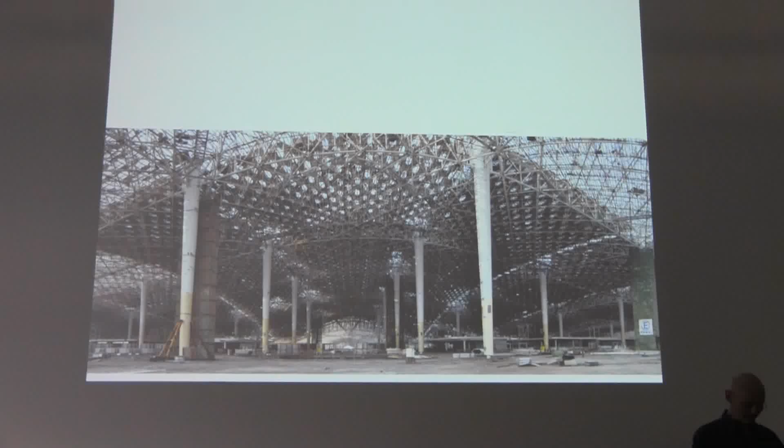Another lecture in our series. And tonight I'm very happy to welcome Jan Knippers. Jan, well, he has this funny combination. He studied all the way in the north in Berlin, where he also did his PhD in 1992. And then he ended up in what is by and by, I suppose, sort of a technical, engineering-wise haven or hotspot in Germany, namely the whole area around Stuttgart.

He went to work for Schlaich Bergermann, a very prominent German engineering firm, after he finished his PhD. And then in 2000 he was called to be a professor in Stuttgart and took over the institute that he's now leading, the Institute for Structural Design.

And then also an important milestone was, of course, a year later in 2001, forming Knippers Helbig Advanced Engineering. It's a firm that has grown over the years, and today it has offices both in Stuttgart as well as New York. And this sort of spread also, I think, is telling of Jan's own development. To look at the list of research projects that they do in Stuttgart is extremely impressive.

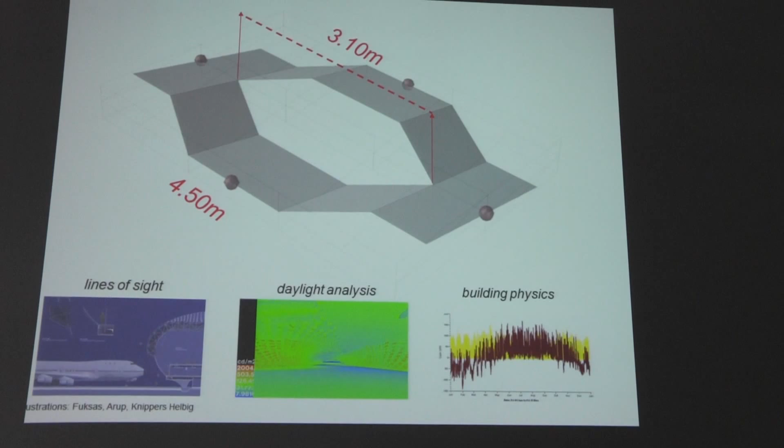These were the 2 design parameters, and we adjusted them to the various conditions of building physics, daylight, and the visual connections that you wanted to have from the inside to the outside.

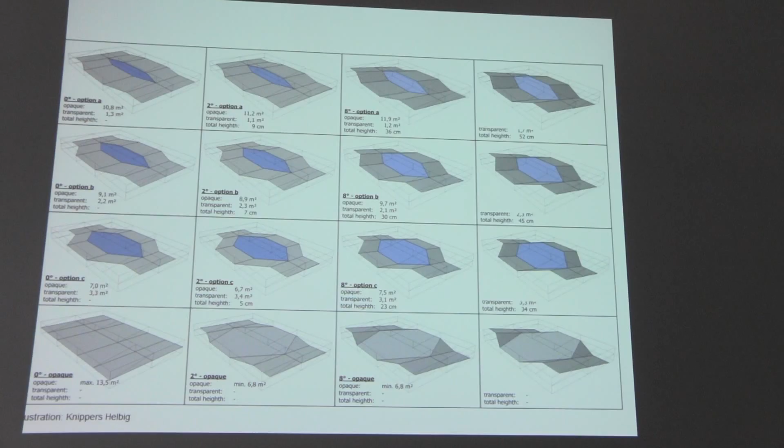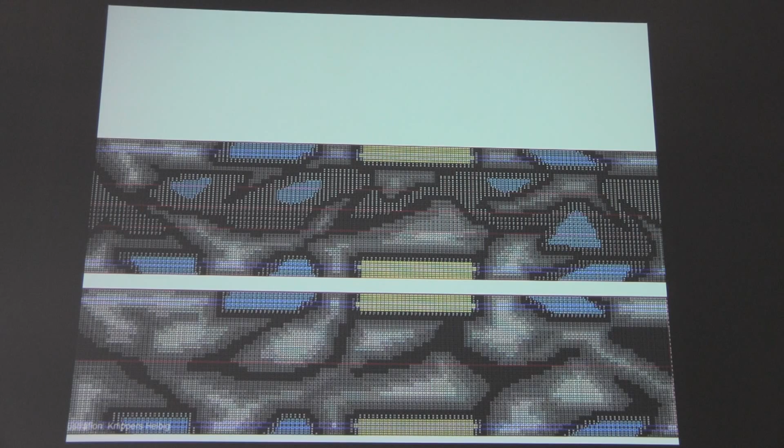So what we basically did is we set up a range of modules, and we allocated them to the terminal building. This is an Excel sheet representing the concourse of the building, and each color stands for one module type. And we printed these Excel sheets and sent them as a printout to the Fuksas office, and he took his pencil and marked how he wanted to have the components of the facade on the concourse building.

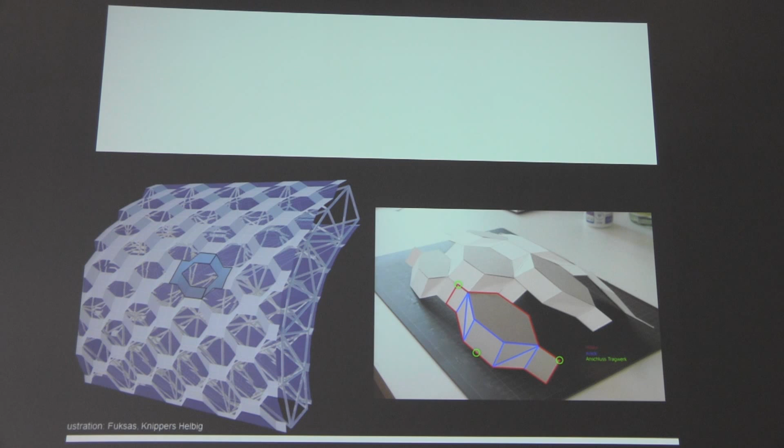It's also very interesting that even though we are quite trained in using all these computational tools, it was absolutely crucial to have these kinds of small physical models, because otherwise the whole geometry is too complex to understand. So from the very beginning, we were working with these physical models. And this was a process of stepwise refinement and modification, adjustment of this 3D model to fulfill all the requirements, to avoid any discontinuities or to achieve planar glass panes.

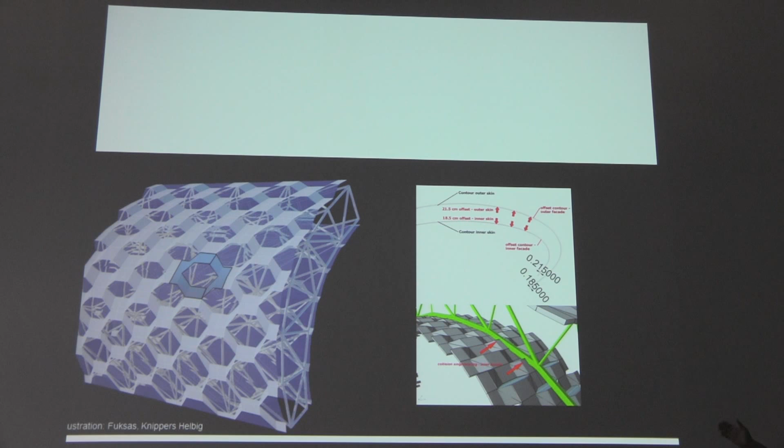That was very interesting because it took us 12 to 18 months to develop this parametric model, including all the structural members as well. But during that time, you don't have anything to show or to hand over to the client. So you always go there, you say you work on the model, but you have nothing to hand over. And that is a quite difficult situation, to keep the client calm and to avoid any nervousness on his part.

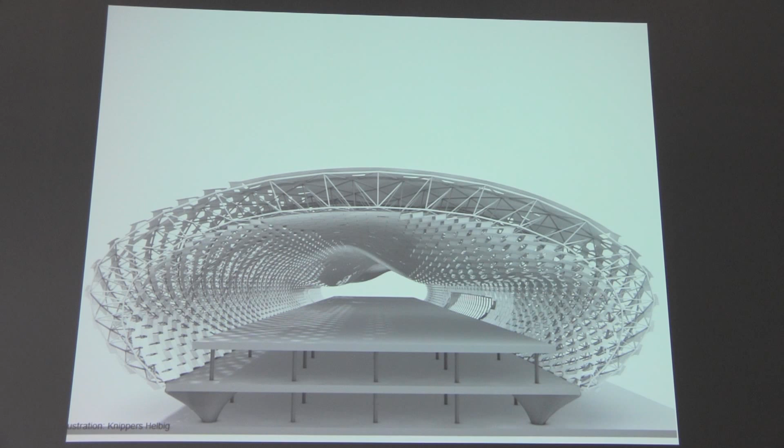So this is just based on Excel and Rhino, so it's not any kind of rocket science computer program or $1,000 million software. It's very simple, basic computational tools that are used here to define this geometric model of the terminal building.

What I think is very interesting and, as far as I know, not really recognized so far, is that this kind of working on a 3D digital model is really a different design process from what we usually have in building construction or in architecture. So usually when we design a building, first there's an architectural concept, geometry from the architect. Then the data is handed over to the engineers. They work on all the technical functionalities. And finally, we hand over our construction drawings to the constructor, and he fabricates all the elements and puts them together on site.

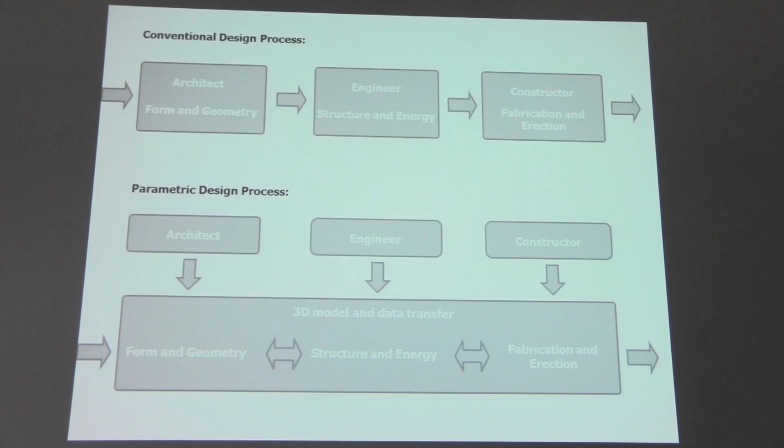But this process, as we had it in Shenzhen and also for other projects, is very different because there's one data model and everyone is contributing to it in some way. But who is doing what and who is responsible for what is not defined by any regulations and has to be discussed and agreed each time again. So in this case, we as engineers were responsible for the basic 3D model. In other cases, special geometry experts are involved, but I think it's a very important factor that you, as part of the design team, define and discuss your own role and your own contribution to the project. This breaking up of role models is, I think, also a very important aspect for innovation in this kind of process.

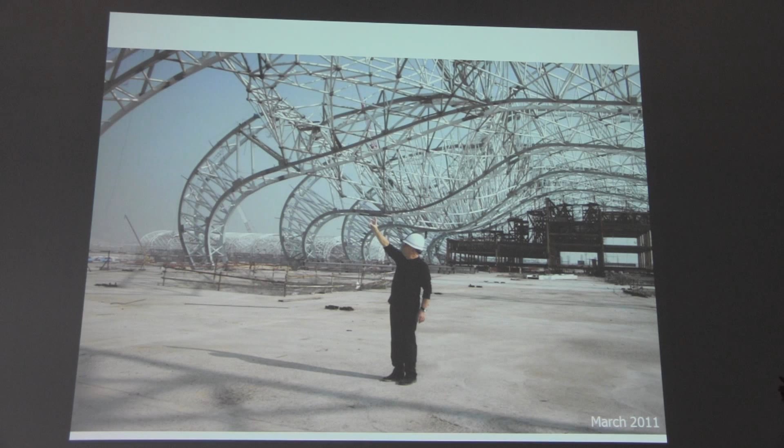So here, Massimiliano on the side, a few words about the construction sequence. You can see in the back this movable scaffolding supporting these spheres, and then the members are welded to the spheres. So while steel construction, here my partner Torsten with Massimiliano on the side. The construction before the internal cladding was installed, during installation.

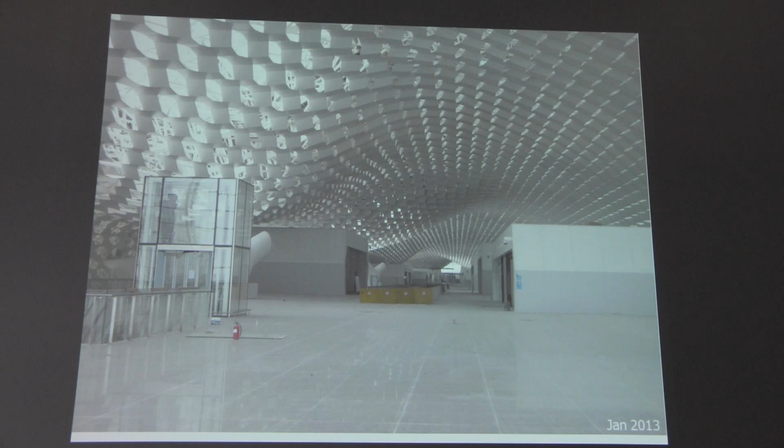And this is a photograph taken 2 or 3 months ago. The terminal building will be open to the public in summer this year. And you can see how the light situation is varying. You can see that in some areas it's a closed surface. In other areas, a lot of daylight comes in, and you can see the structural system behind the internal cladding. This is the entrance hall to the concourse building.

So you cannot talk about construction in China without talking about construction speed. It's a story that has been told many times, but it's still very fascinating, especially when you have this background that you're in Stuttgart or Berlin airport.

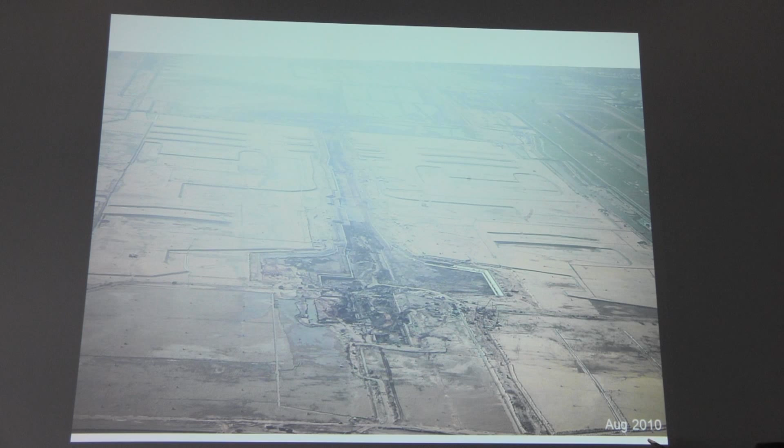I think that this project reflects quite well how computational tools are used today in architecture. They're used to design complex geometries, complex facades, but I have to say, as a structural engineer, the underlying structural system is quite conventional. It's a two-hinged truss arch system; the geometry is a little bit fancy, but the basic structural principle is very well known and very traditional.

And I think that is very typical for the application of digital design. We're always talking about complex geometries, but we very rarely talk about how to use computational tools to improve the performance of the structures. And that is a point where I want to work on in Stuttgart at the university.

And I think that has its origin in the fact that architects and engineers think very differently. Architecture basically always seeks a very individual, unique solution representing the specific conditions of site and function. And Massimiliano is, I think, a particularly good example of that. He's always looking for a very special appearance of his buildings.

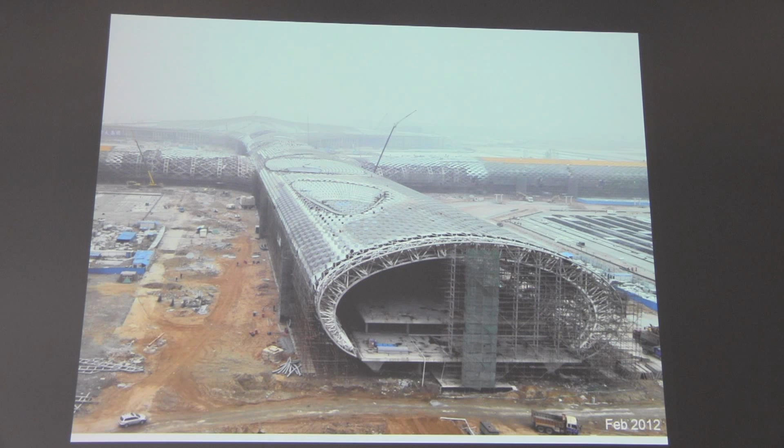Engineers think exactly the other way around. To achieve integrity and functionality of the technical system, engineers always tend to use the same typologies that are approved and evaluated again and again. And that is why we have so many problems, I think, in communication between engineers and architects. It is a completely different way of approaching the design task. Engineers look for the typology that fits the project, while architects look for the unique expression.

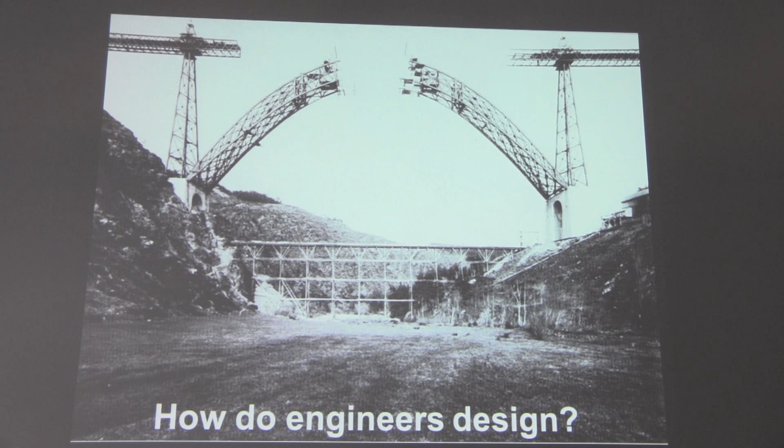And you can see that everywhere, also for these large halls. Suddenly enormous spans, but the same typologies are used again and again. I found this book showing all the railway stations built around the turn from the 19th to the 20th century, and they all use the identical structural system: 2-hinge arch, 3-hinge arch. And this thinking in models and typologies governs engineering till today.

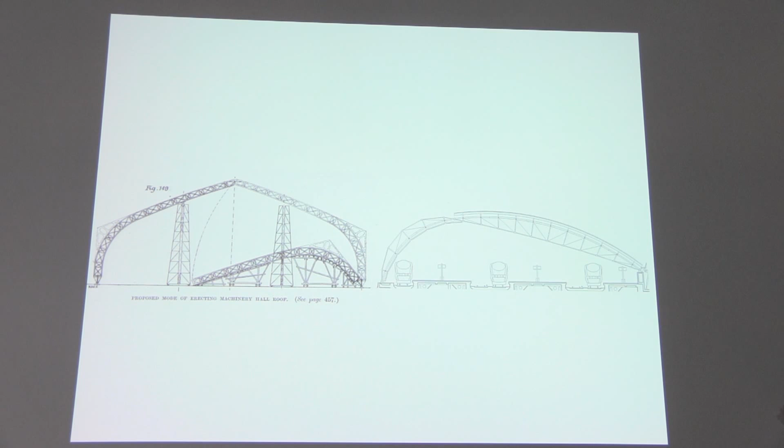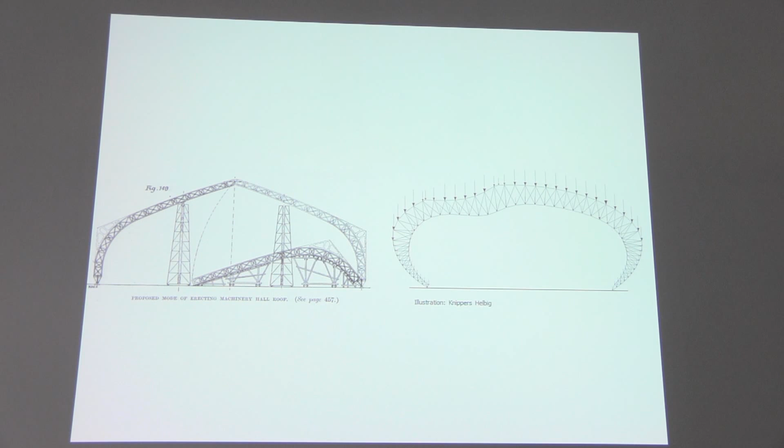Even in times when we have computer programs and can calculate everything, we still use the same typologies. This is a cross-section of the Shenzhen airport. I'm not better than my colleagues. We also use maybe crazy geometries, but the structural system is basically the same that was invented in the 19th century. And the question now is, how can we invent, find new structural systems beyond these typologies?

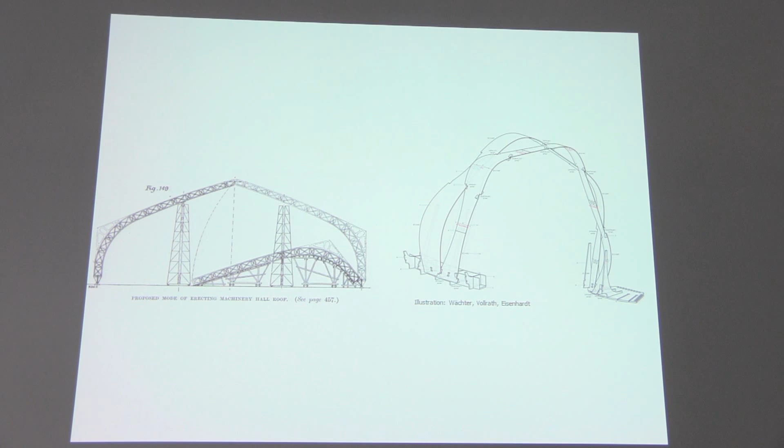And this system here is, in terms of 19th century theory, impossible, because it does not have 2 hinges or 3 hinges. It has 1, 2, 3, 4, 5, 6, 7 hinges. So it's an unstable system in the classic theory of structural mechanics. And this is only possible by geometric variation. So it's no longer a linear arrangement of identical arches.

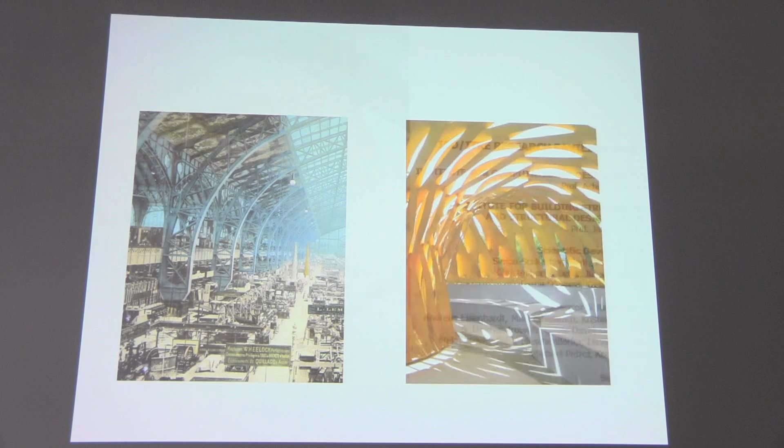It's a complex arrangement of geometrically differentiated forms. The hinges are the weak points of the arch, and to achieve integrity, you have to vary the position of the hinges in the arches. So this up and down of the waves comes from a structural need and is not based on an artistic, aesthetic intention.

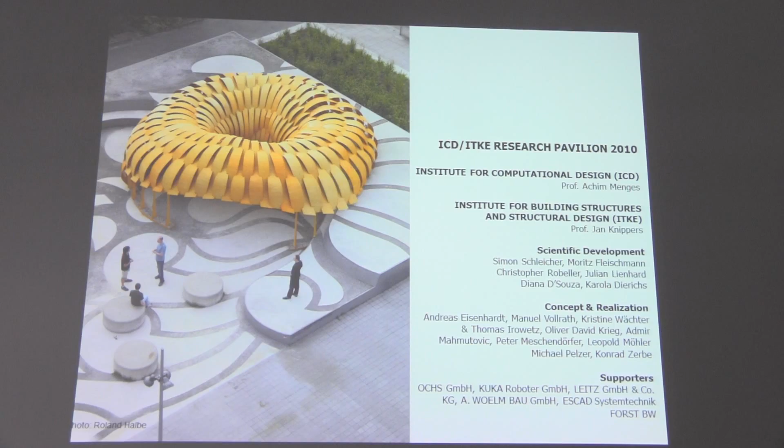So this is an example for a structural system, a new structural system beyond typologies, which is possible through computational fabrication and design. But usually, and this is also not only the geometry, but also the fact that usually engineers try to avoid deformation, deflections. Here we need deformation to achieve integrity. You can see that the lamella is so fragile, so weak, so 1, 2, 3, 4 students have to carry them, and integrity is achieved only by bending and connecting them to the neighboring strips.

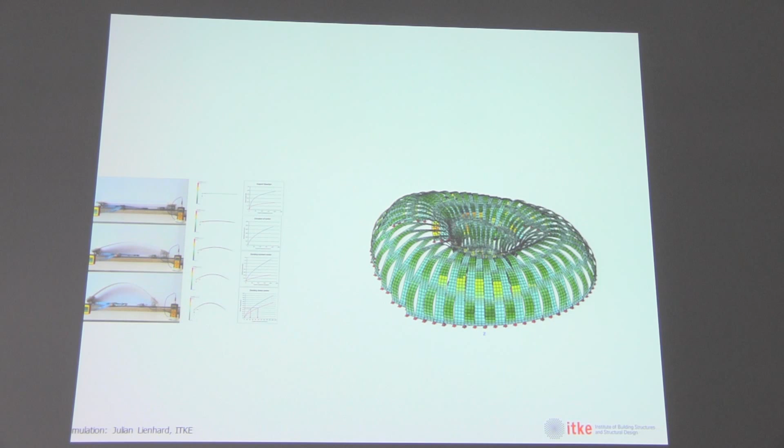So my experience is that schools of architecture always talk about computational design and computational fabrication, but what is not recognized is that we also need the aspects of computational mechanics as the third element to design new forms. Only since 10 years, I would say, we have the computational tools available to simulate large deformation and anisotropic material behavior. So this aspect is also very important for new structural forms.

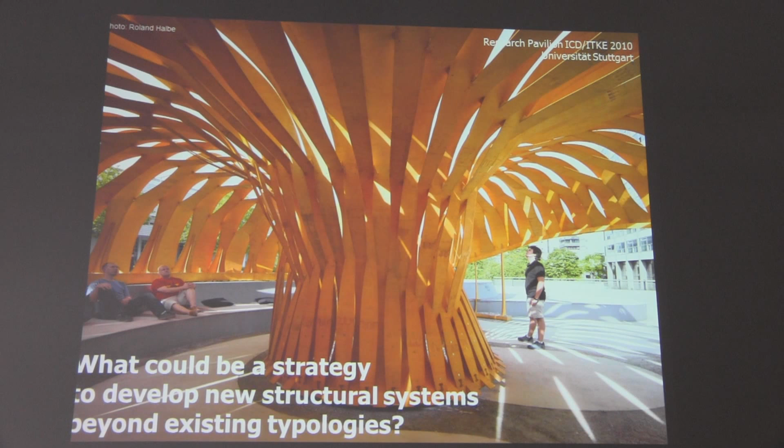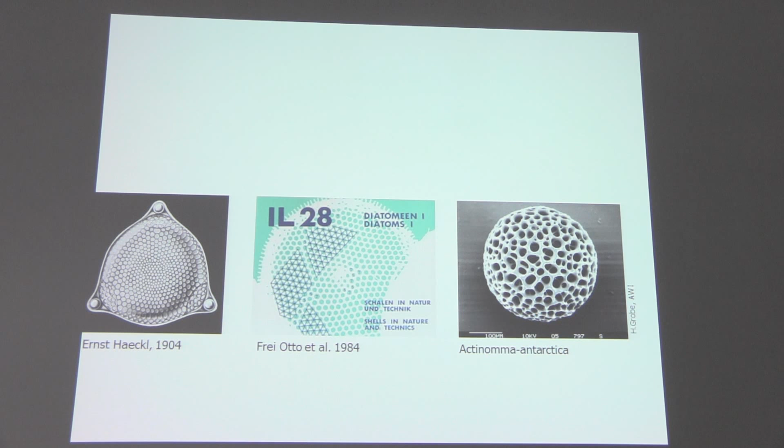So this system here is based on the individual creativity of our students and our PhD students, but what could be a consistent strategy to achieve new structural systems beyond typologies, which is not based on a genius? And the strategy that we propose and we follow is not very new and not very original. Others looked in that direction before. It's to look at systems which are not governed by the criterion, by the paradigm of calculability, but which are developed by self-organization to fulfill multifunctional requirements. So we try to understand biological role models to look for new performance-oriented systems. And this is what we try to do now.

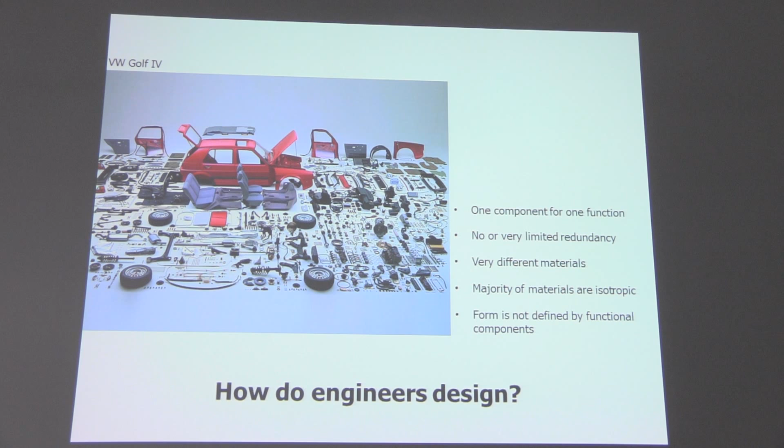The second aspect is that if each of these components is optimized to fulfill one or a very limited number of requirements, this leads to a huge amount of different materials. So the tires are optimized for maximum grip, minimum wearing. That leads to a specific rubber. The dampers are optimized for maximum energy absorption. That leads to a specific metal alloy. So we have a huge variety of different materials used for this technical system. And at the end, all these very different components are put together to form the system. And then we have the body of the car, which forms the outer form of the car. And this could not be more different from the way that structures are designed in nature.

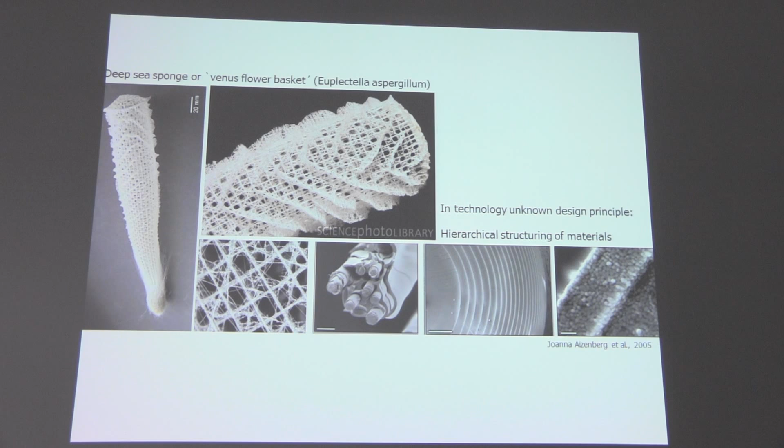And this is also an example that has been shown thousands of times, but it still is, for me as an engineer, absolutely fascinating. That's this deep sea sponge. It's a sponge like this size, 20 centimeters, made of a very brittle glass-like material. And on the macroscopic level, it looks like a steel tube with diagonal stiffening members, as we as engineers would design it for a high-rise building. But when you go deeper into it, you always see that one component is made of many components, which again are made of many components and again of many layers, all with the same material. The way it is constructed and made is completely different from any technical system. And you find this principle of hierarchical structuring that's omnipresent in nature, but nowhere used in technology.

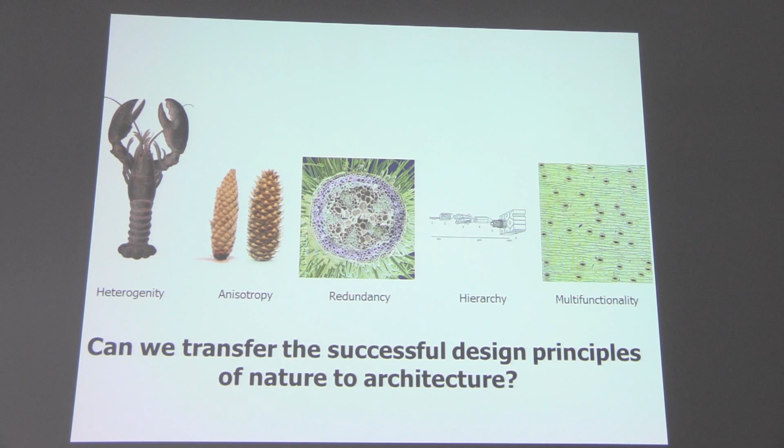So we have these design principles. You can describe them and define them, but basically they're all the same. They're all using one material from here to here, but with locally differentiated properties. And this is well known since many years, but now we are at the point where we might have a small chance to transform these principles into building systems. And that's what we try to investigate and analyze together with students.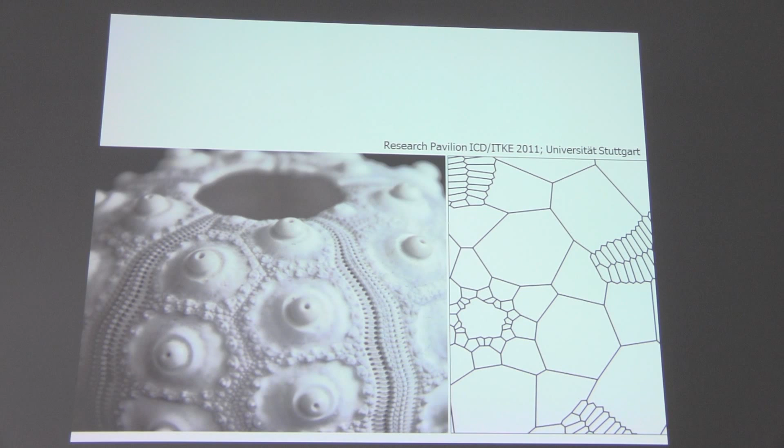So our first project was the sea urchin that we did in summer 2011. And it's a modular shell. It's a challenge that we face very often also in building construction. Think of shells made of precast concrete elements or of glass. This is also a modular shell, and we try to understand the underlying structural principles, to analyze it and to transform it to an architectural form.

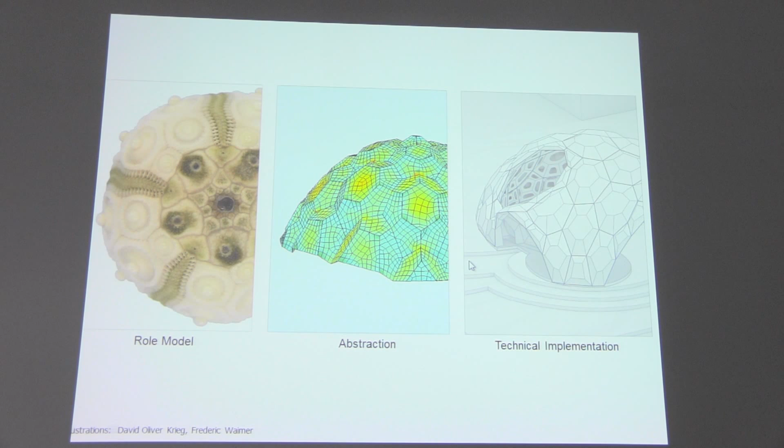You can see how these plates of the sea urchin are connected. They have a specific finger joint arrangement, which has a high capacity for shear forces and a high capacity for compression forces, but a low capacity for bending and also for tension. And we transferred this to these kinds of finger joints here for timber plates. And this is possible.

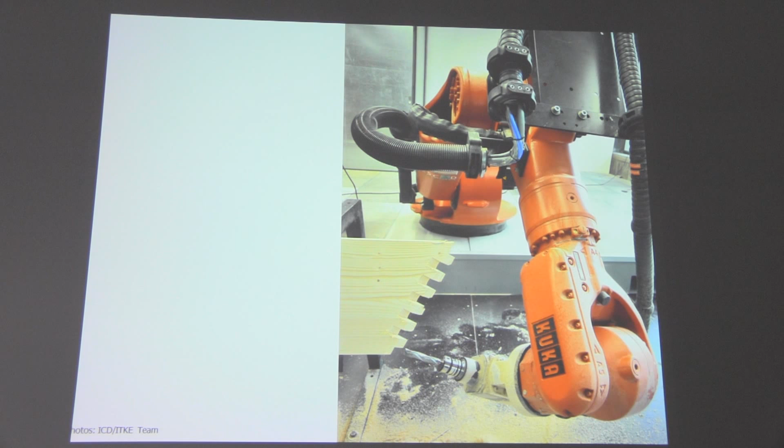I mean, this finger joint technology is well known in timber construction, but usually restricted to rectangular or planar situations, and by this robotic fabrication we can adjust it to any kind of geometry. And this specific load-bearing capacity of these joints here, this high shear strength, high compression strength, but no bending strength and no tension strength, leads to the specific arrangement of these hexagonal plates. Because when 3 edges meet in one point, you can form a stable shell structure even though the capacity of the joints is limited.

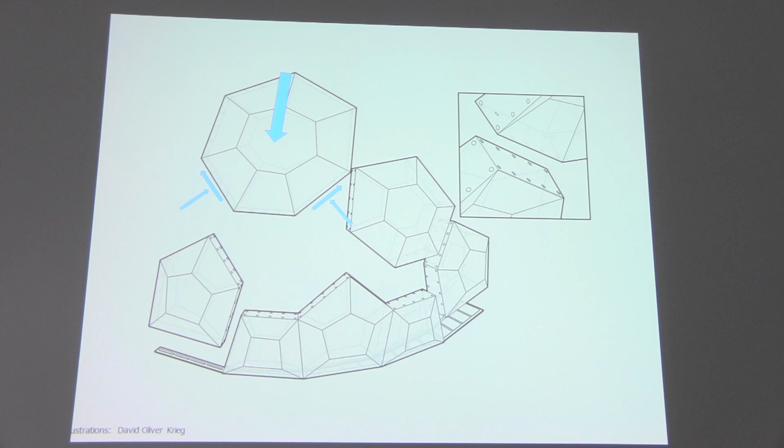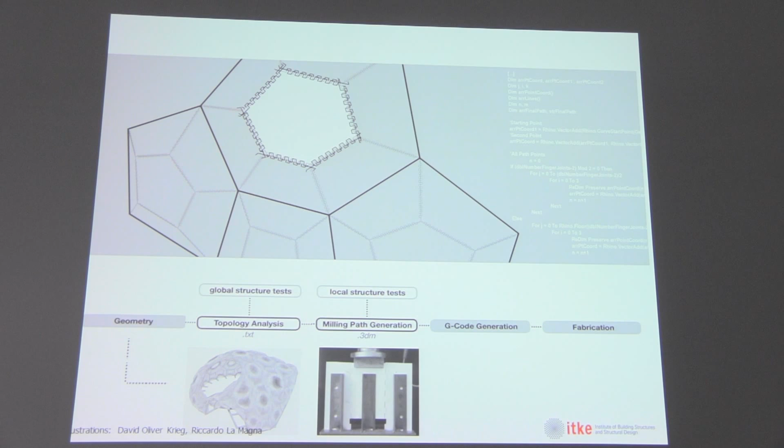And again, it's not difficult here to do the structural calculation or to do the mechanical tests, but the question is, how can you include the structural behavior into this design chain? That's the key point and the key question that is the main focus of our research. So this was again done by Achim's group and by my group.

And what is interesting here is that this really is a different kind of collaboration between engineers and architects than we usually do. Everyone has to define his own role. And this is Elias from Achim's group. He's doing the control of the robot. It's a tough engineering job, I would say. And Riccardo and my group think about solutions, how to include the information from the structural design into the computational design process. So everyone has to define his own contribution, and this breakup of traditional role models is, I think, very important for innovation.

And it was not our intention to build a large sea urchin. Our intention was to show how this principle of the sea urchin could be applied to a free architectural form which is characterized by cutouts or by edges or by all kinds of irregularities. And you can see how these modules follow the mechanical loading: where you have high forces, you have smaller and stretched modules, and where you have smaller and regular forces, you have these larger and regular hexagons.

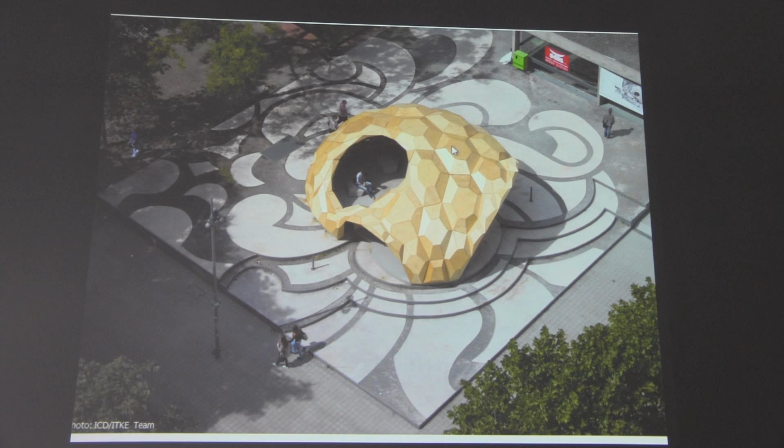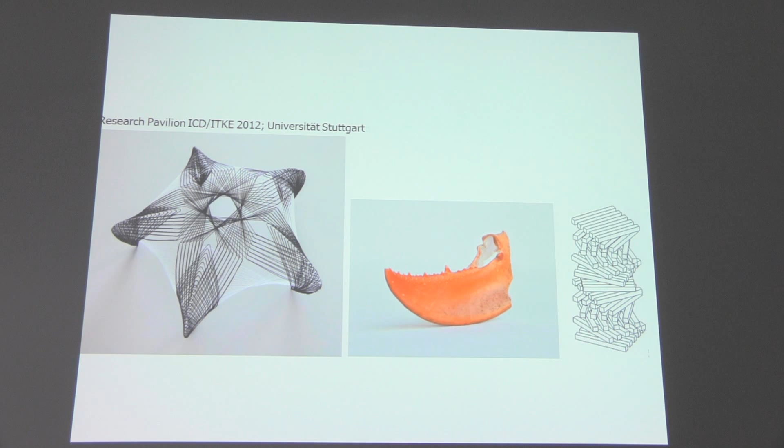This is a production sequence. We were also looking for a way of, we asked ourselves, what could be a reasonable production technology, fabrication technology for fiber composites in building industry. We know that especially in Stuttgart, they put a lot of research effort on lightweight structures for car industry, but car industry means thousands of identical pieces, and in building industry you have unique elements, and if you build a form for a house and then put fibers on it, I mean, that makes no sense.

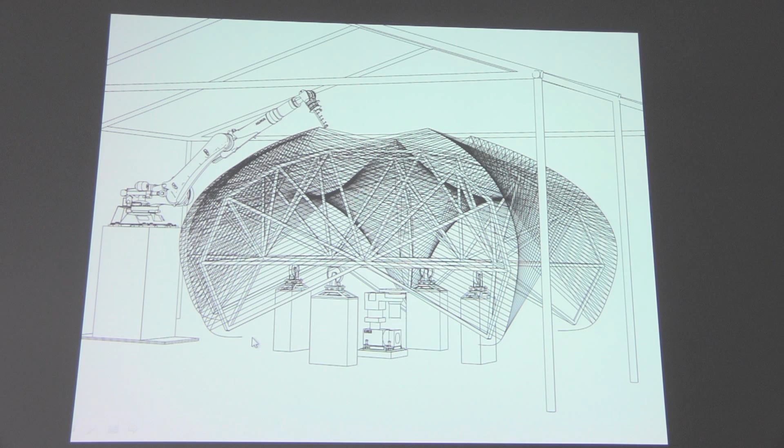You need different ways of fabricating them, and that's how we try to answer the question how we could build large elements and elements that are only produced in a small series or even as unique elements. So all the winding logic, different ways of winding. These are the carbon fibers, these are the glass fibers to form the space.

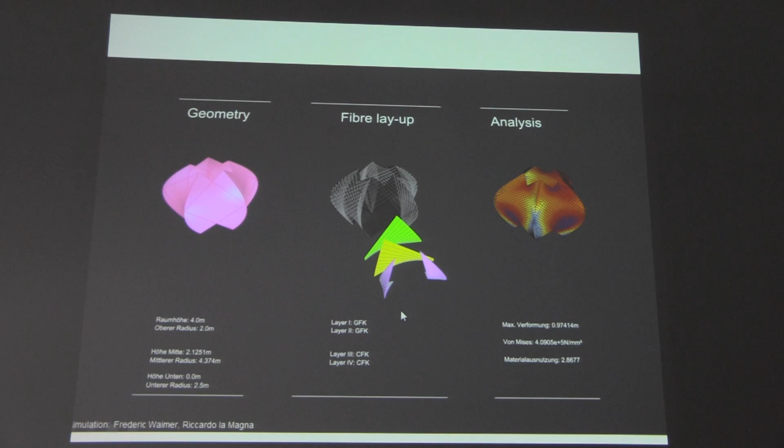All this, again, the structural analysis, we had 6 geometry parameters, diameter and height of this point, of this point, of this point. We varied them. These were the basic fiber layers, and we did structural analysis, tried to find out the optimum configuration, and then we did all the optimization of the fiber layers for the optimized geometric configuration of the pavilion.

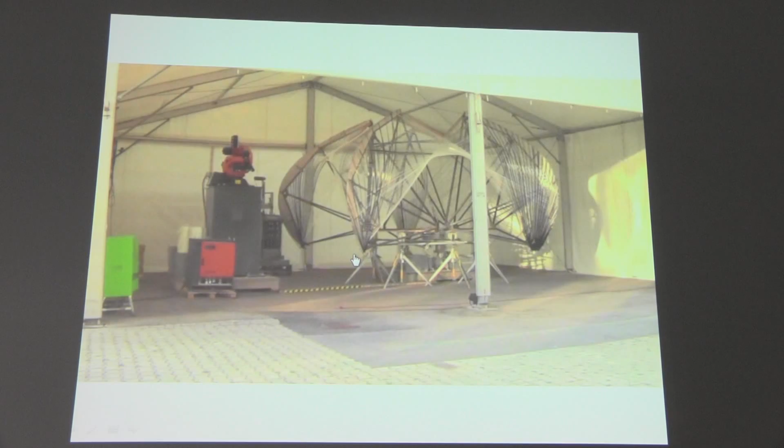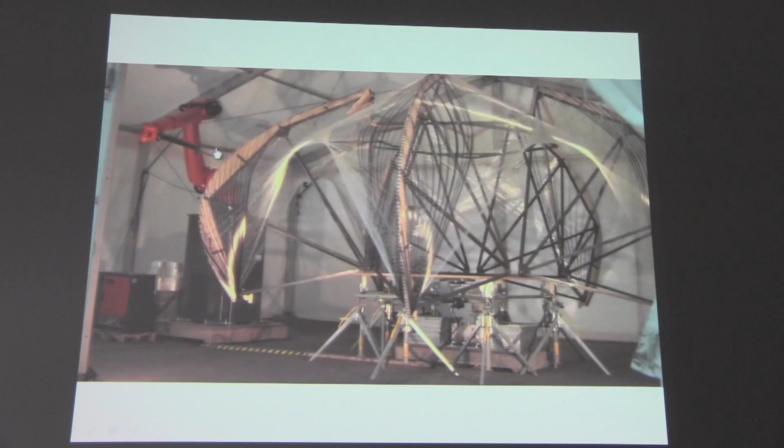This was one of the first test runs. The fibers are still dry. That's why they are so shiny. You cannot see it, but here somewhere is the roll where the fibers are, and then the robot places the fiber on this rotating scaffolding. Next one is from the perspective of the robot.

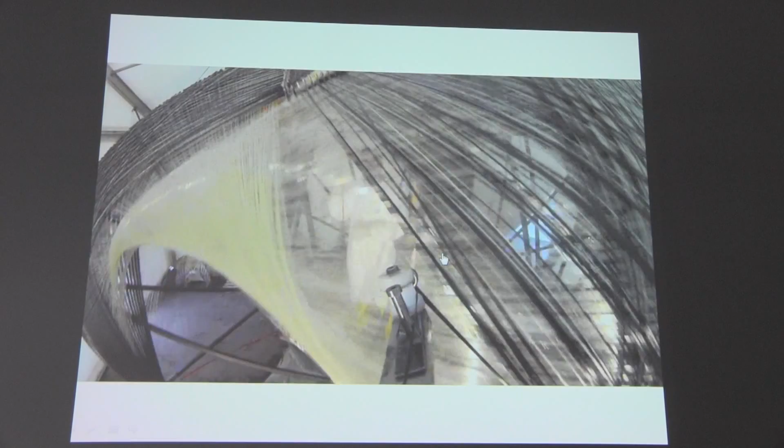Black ones are carbon fibers. This is what is used in aerospace industry or in Formula One racing cars. So the very stiff and strong fibers. The white fibers are glass fibers. They are used for surfboards, snowboards, sailboats. They are the soft and cheap ones.

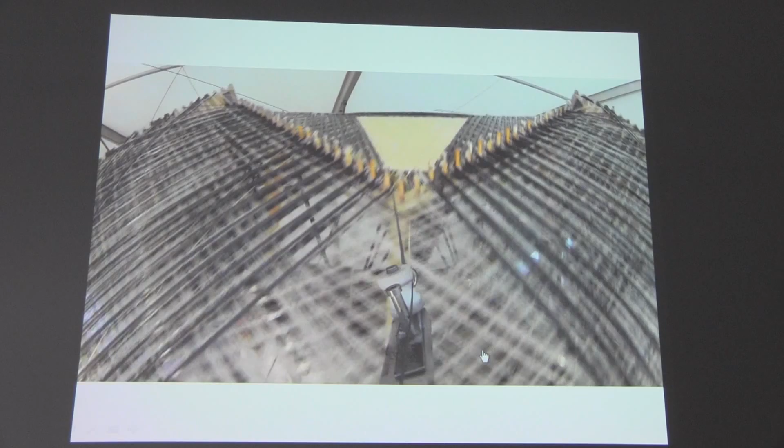So what I found interesting is that this is a fully automated process, but the surface is not at all perfect. It shows how the thing is fabricated, and it also has a kind of three-dimensionality and depth that you can see here. So this is the building as it was installed last year. Again, the stiff black ribs, and the soft white walls envelope.

And for me, what is interesting here is that this is something that is really far beyond any typology in building construction. So there's not one path of load transfer. It's a complex arrangement of fibers, and you don't know exactly what happens here with the forces, but it's this kind of complex and multi-layered arrangement of fibers that leads to a stable system. Yeah, as a new expression of adjusting stiffness and load-bearing elements to a load-bearing structure.

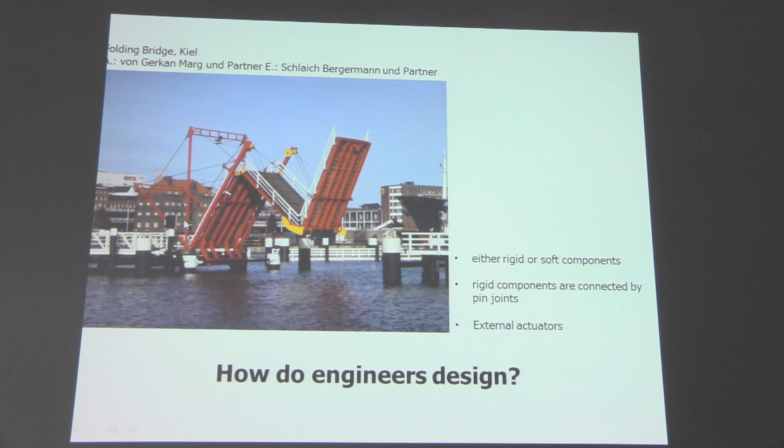So what we could do now is extend this comparison to movable structures. When we as engineers design movable structures, we use either soft elements like cables or textiles with no bending stiffness, or we use rigid elements as steel girders with very high bending stiffness and connect them by bearings or joints. That's how we do moving systems in building industry. And we have a motor somewhere here, an external actuator actuating all these systems.

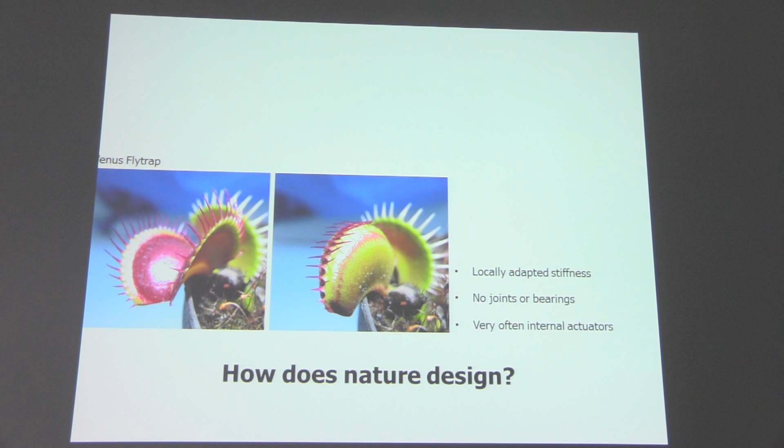And again, this is very different from what nature is doing. Nature is not using either stiff or soft elements. Here we have a locally adapted stiffness according to the functionality of the system, and we have an internal actuator. The whole thing is actuated by internal change of pressure in the cells of the element. And we also investigated this. We teamed up with biologists from Freiburg and had a look at this bird of paradise flower.

And the special thing about this flower is that it's pollinated by a bird. A bird is very heavy compared to a bee or another insect. And that's why this petal has this perch, a quite stiff perch. And when the bird sits down, the perch bends down, and the pollen that was protected before by these blue leaves is then exposed and can be lifted by the bird to the next petal.

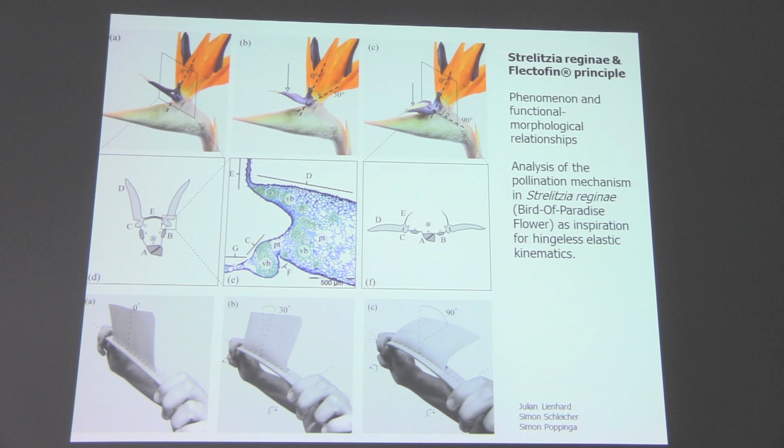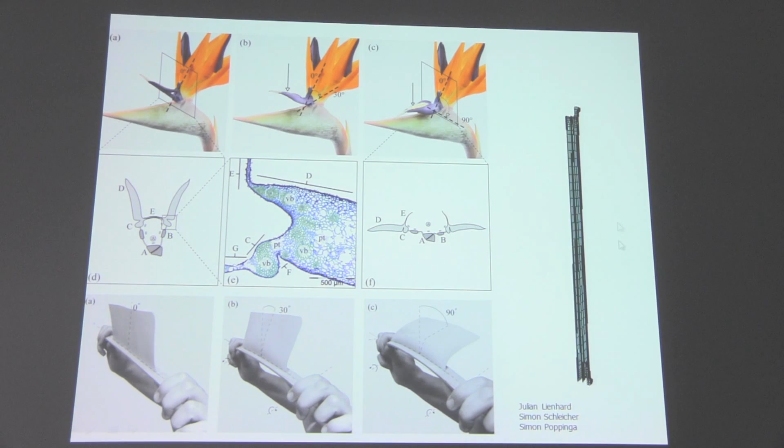And nature uses it as a method to actuate a complex movement by a small actuation. Small bending leads to a complex and large deformation. And that is what nature does and what engineers usually do not like. But this change of perspective, that is something that is coming out of this biomimetic inspiration. And we transform this to mechanical models, to finite element simulations.

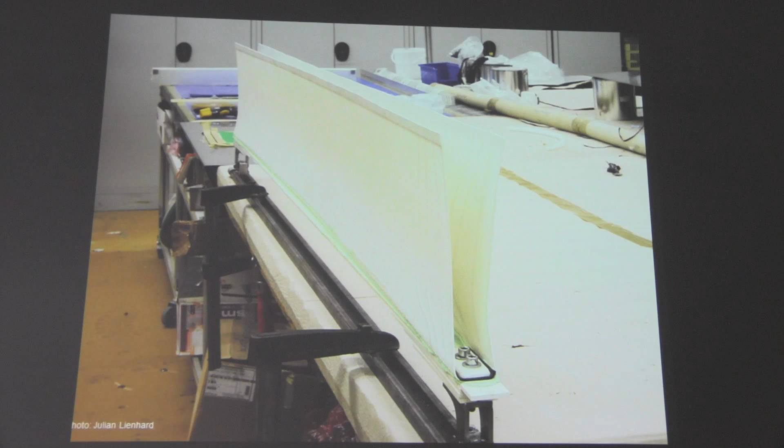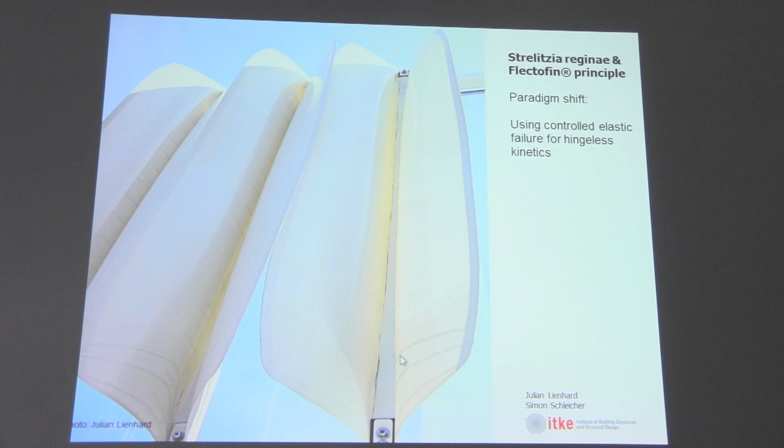We build prototypes with the friends from ITKE, Denkendorf, where we also met once. And these are elements which are only made of fiber-reinforced polymers. You can see here additional fibers. You can see how here is one glass fiber mat, two fiber mats, and this is only deformed by bending of the backbone.

And this was a project that was widely recognized, won a couple of prizes, awards, not because it's the best sun shading system ever. I mean, there's probably other systems that are more effective than this one, but because it really is a new approach to kinetic systems in architecture.

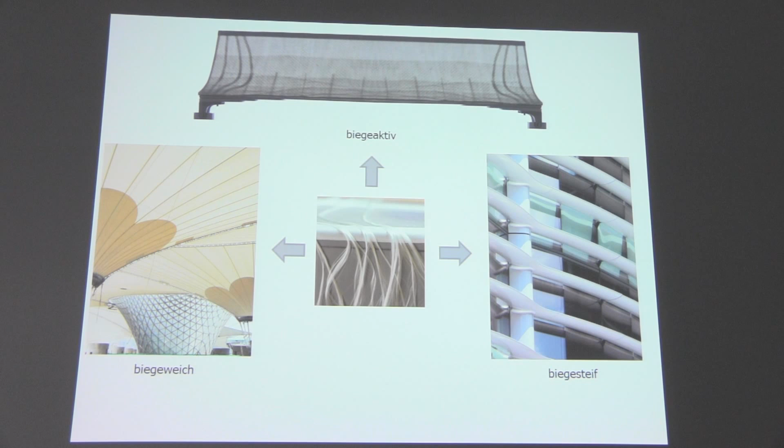Deformation by bending. Because usually, as I said before, what we usually do is we use fiber-based elements either for soft textiles, as in large stadium roofs, or for stiff elements, as in sun shading elements here in London. What we did here is we locally adjusted the stiffness and used the stiffness and bending to actuate this deformation. And that comes from this biomimetic approach in research.

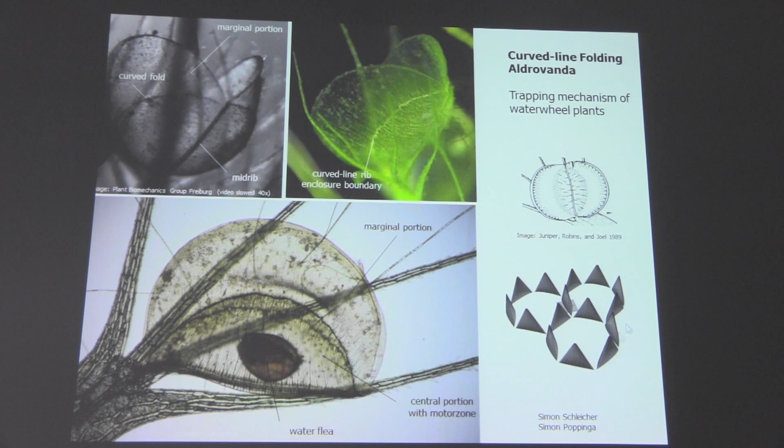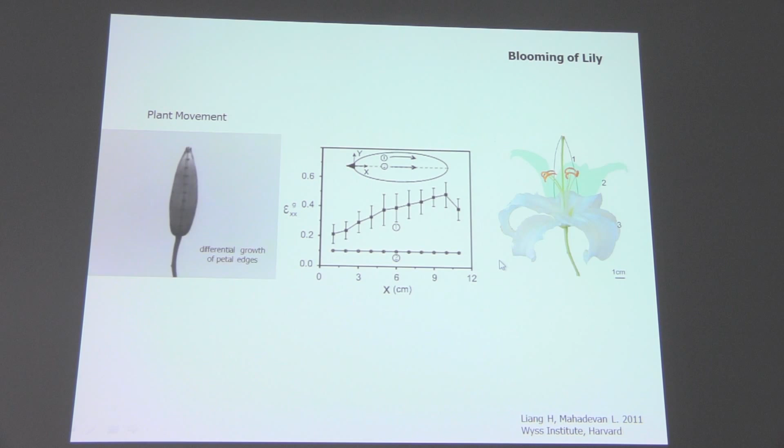So the fibers here in the center of the petal, of the leaf, show a smaller elongation than the fibers at the edge here. And this leads to the opening of the leaf as well as to these characteristic crinkles of the lily here. And we transferred them to try to understand them and to do this finite element simulation of the opening of the petals.

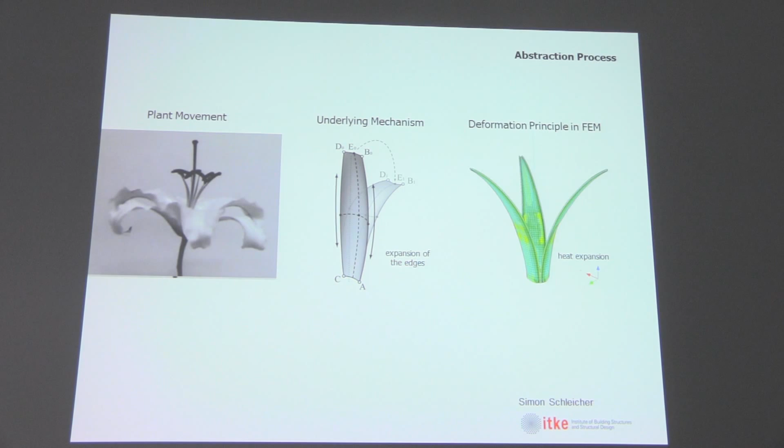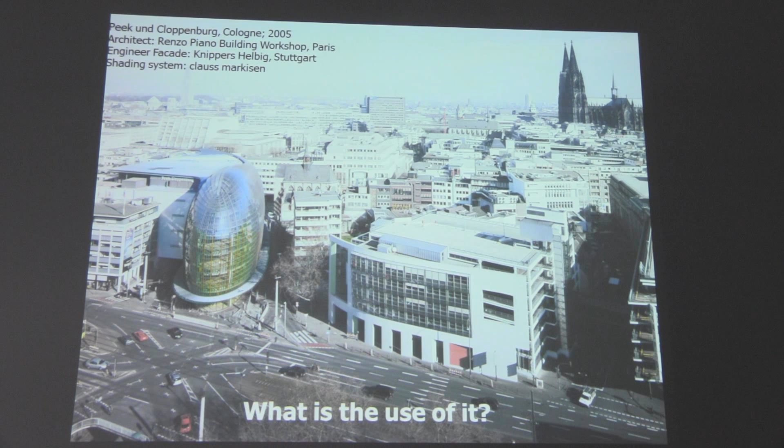And that is very fascinating work for me because I usually use these finite element programs to simulate high-rise buildings and bridges, and now we apply them to the simulation of the blooming of flowers. And that's, of course, a very interesting thing to do. But at the end, you want to build something. I'm an engineer at the end of the day. I don't want to do research only. I want to use that for something. And at the beginning, we did not recognize what this is good for. We found that finally during the process.

So this is one of the first major buildings that we did in my office together with Renzo Piano. That's this shell in Cologne, Peek & Cloppenburg in Cologne, and nice structure. Everybody was happy. But the problem was how to put sun shading on it. It's physically not possible to put the usual sun shading devices on this kind of complex double curved geometry because they all have this kind of straight axis of rotation or of translation. They all need this, and that is not possible to apply to any kind of complex form geometry.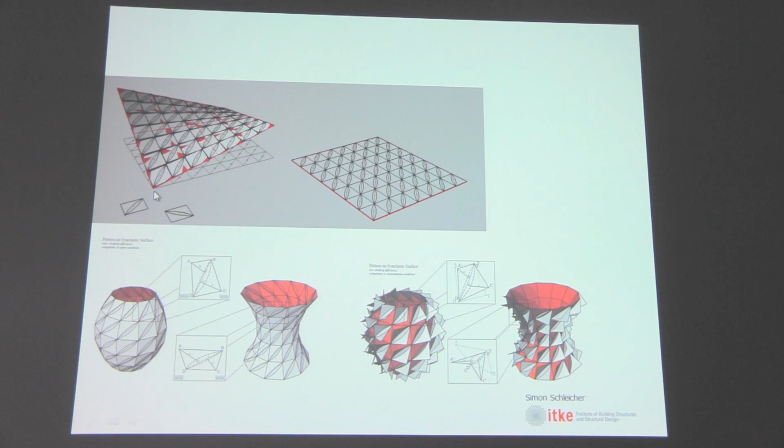And if you do so, you end up with a nightmare here of all kinds of winches and rollers and ropes. And I don't think that this will work very well for a longer time. And these kinds of systems that use only bending and not rotation or translation, they can be adapted, adjusted to any size and to any curvature of the system, and they could be used as a shading device for complex form geometries. That's where we see the field of application for that.

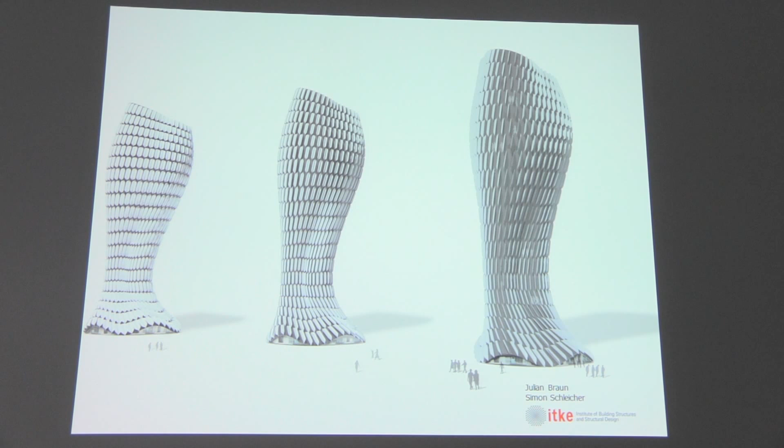So one of the really very, very lucky coincidences in my professional career was that just at the moment when we were working on these issues, we were approached by SOMA. SOMA is a young architecture group from Vienna. They're all coming out of this Coop Himmelblau office. One of them is still working here on the EZB tower. And they won this huge international competition in South Korea.

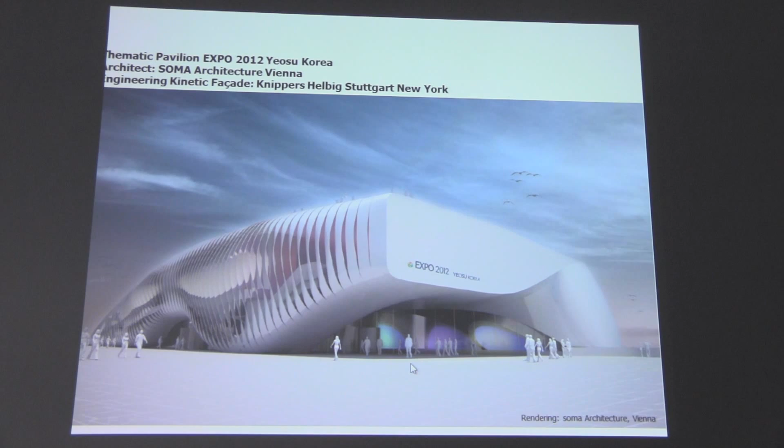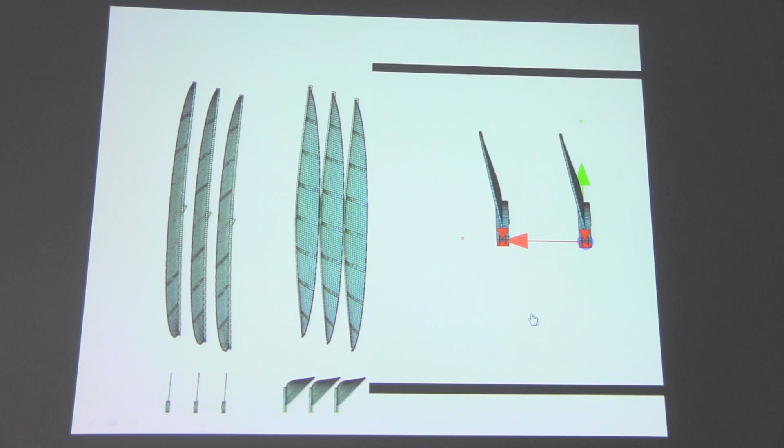And they won the competition with this rendering, with this idea of a kinetic facade. But they had, of course, no clue how to construct it, how to do it. And with that image, they came to us. Initially, we tried to apply the system with the backbone and the soft leaf directly to this geometry of the building, but this did not really work very well, because we did all the structural calculations and it was proved to be stable for the high wind loads and so on, but did not really fit geometrically to this

shape of the building. So we then developed another idea which is very simple, which could not be any simpler than this. It's a strip of paper. Here we have two fixed bearings, and here we have two fingers pushing inwards. And this again leads to a buckling of the thin elements. And this kind of controlled buckling is used here for the opening of the facade.

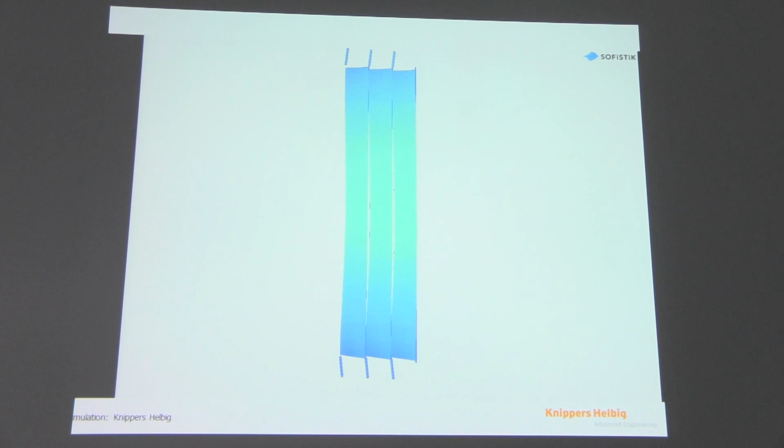So you can see here a simulation again. Here is a mechanical device pushing inwards, and this leads to this controlled buckling. So a small force, a small deformation actuates this complex rotational opening of the sun shading elements.

These were the first mock-ups built autumn 2011. You can see this is 14 meters high, only 8 millimeters thick, and only one stiffening rib on one side. And here you push inwards, and that leads to deformation. And I think even if you're not a structural engineer, you can feel how this gains stiffness from the internal stress and the deformation.

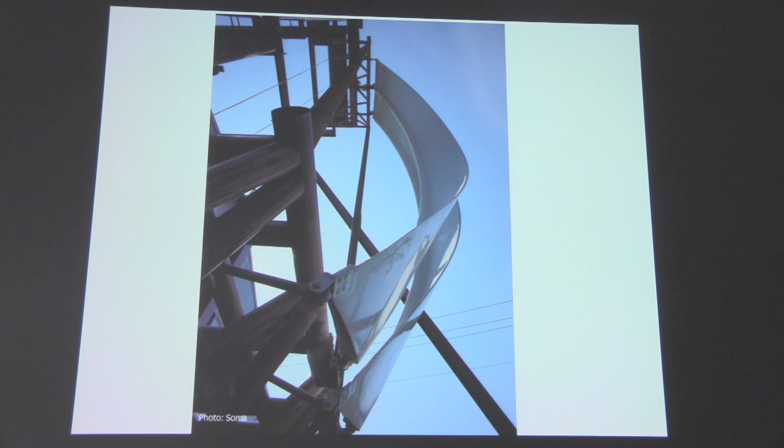We have very high wind loads here at the Korean coast, but these very thin elements can take these wind loads because it's a very stiff and strong internal stress configuration. And also the fabrication is very simple. One mold. Here you can see the glass fibers on the roll. It's a very simple fabrication process.

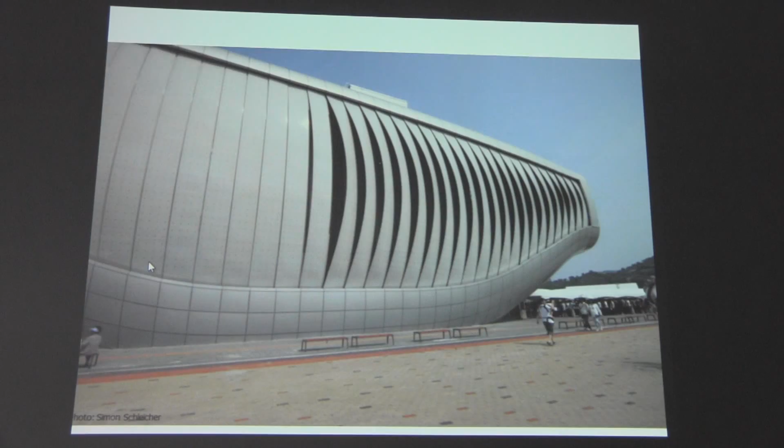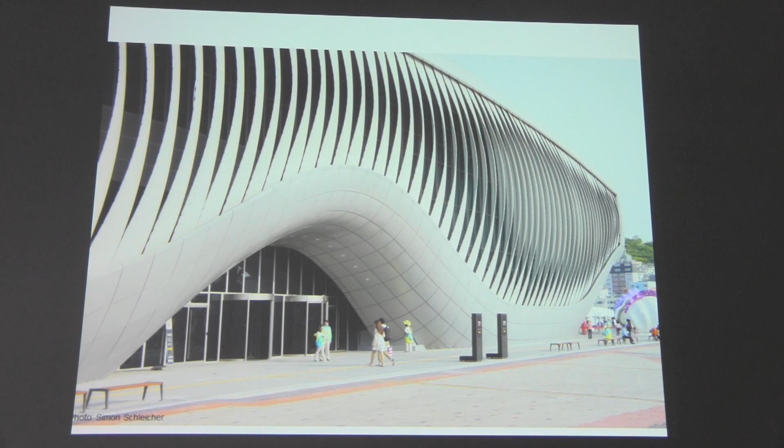And that is how it worked when we were there last year. May last year, we were there and took these images. You can see here the opening of the lamellas. Behind there is a glass facade. In front of that are the sun shading elements. In there are complex video exhibitions. The Koreans are very keen on all this video LED stuff. So there's a huge installation in there, and so they want to control the daylight in the building.

That's the building. And what I find very interesting with a little distance now is that this is using very simple geometry, very simple materials, nothing new about it, but it still is something which, as far as I know, was not done before at the scale of a building. And this innovation, I think, comes from the analysis of biological role models.

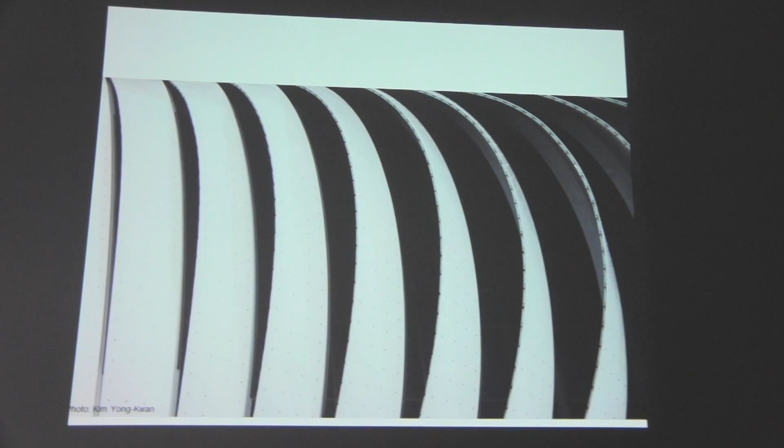Are there scale issues in the translation from the biological to the... Yes, of course. It's always a scale issue. And that's also why it's not possible, and there is a misunderstanding of biomimetic research, to transfer the petal directly to a large building. That's also why in all these popular reports on biomimetic research, there's always this lotus effect, the self-cleaning effect, because that is one of the very rare examples where a biological role model was directly transferred to a technical application.

I would say it's more a kind of inspiration, not a direct transfer of the natural system to a technical system. But with the fibrous materials, you begin a new approach. Yes. That is an aspect that I've forgotten to mention. What is really

interesting in these fibrous materials is that for me as a structural engineer, when I build a house, I take a steel girder with given properties, I buy it in a shop, and I use it with its given properties as it is. I have to deal with that. And here I can design the material itself, the fiber orientation, the fiber layout. So I just extend my design space as an engineer. And that is a very interesting aspect of these materials.

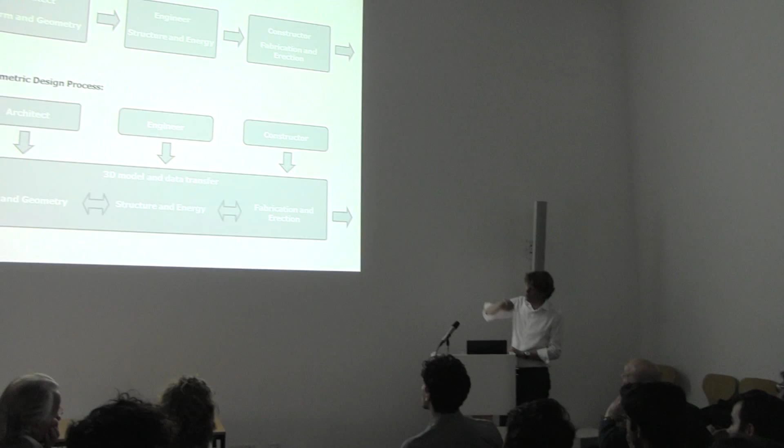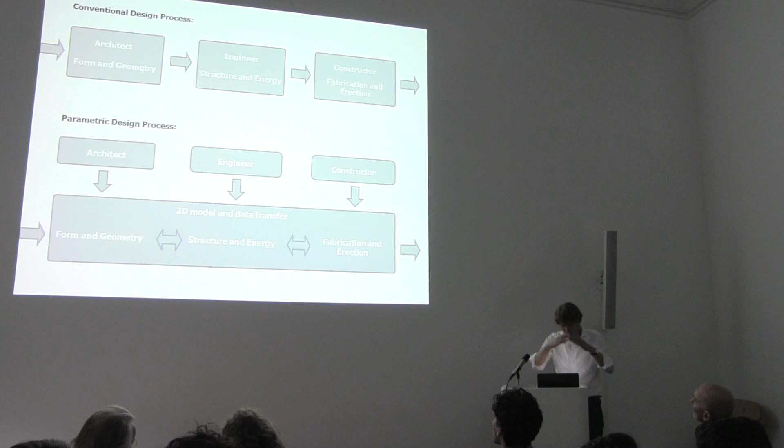I think that is a very important aspect, because in 95 or 99% of all real life design processes, it's up there. So there's a well-defined scope of design for each one involved, based on a fee regulation, and everyone is first looking at his own box, what he has to do, what he has to get from the architect or from the client, what he has to provide to the next one who's coming after him. So this is a very limited view. We are forced to do so because we get a fee, and the fee is limited, and we cannot do everything.

But what is interesting here, and that was really very interesting not only for the research projects, but also for Shenzhen Airport, for example: we need a 3D model for the geometry, but who is doing that? So you sit together at the table at the beginning of the project, and you're discussing who is doing what. And you also have to ask yourself as an engineer, what can I do? What do I want to do? How do I want to be involved in the process?

And that's a very different approach to starting the design process than to know this is my scope of work, I have to get this, I have to provide this. And I think that this is also a very important aspect, bearing a potential for innovation that is not recognized, that you redefine your own role in the whole process at the beginning, and discuss that with your partners.

And does it include participants on the left side of the diagram, or also on the right side when you're speaking about fabrication and construction? Yeah, I could show other projects where we were working on the side of the constructor, but were responsible for the 3D model development. This also involves the constructor, not in this specific example of the Shenzhen Airport, because that's the same as for the project in Korea. At a certain stage, you hand over your documents, and that's it. But in other projects, the constructor is also involved, of course.

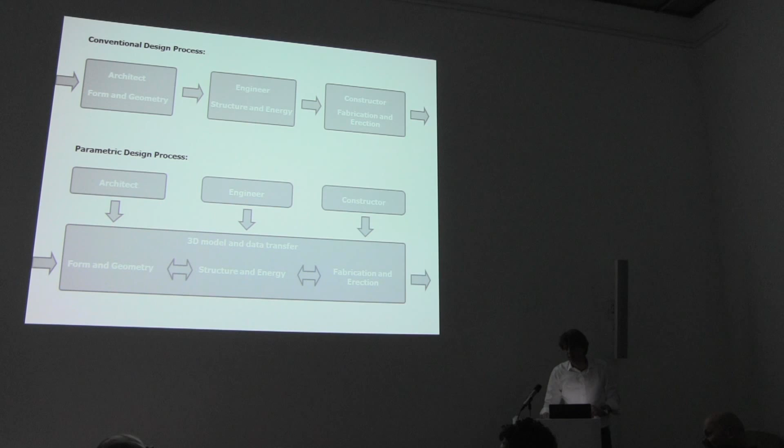I think also this is a very important question. When you work in China, you have a completely different situation with the cooperation with the contractor. There is no bidding phase. In China, things are going a certain way. No one really understands which way they are going. So, in my experience, there are always two questions. One is the question of money. Who is paying the extra work that is necessary to work on the parametric model? And the other is the question of responsibility.

Here in the Western countries, normally for a project, there is a very decisive step when you hand over the documents to the contractor. You also hand over the responsibility for the quality, the responsibility for cost, the responsibility for maintenance and for everything, in a legal way. This is very difficult if you hand over a complex data set.

That's why very often in the international context we have this design and build process, where there's some kind of idea of the architect, and then the contractor is hired to do the whole design process, including structural engineering works. Because then all the responsibility is on the side of the contractor. Yeah.